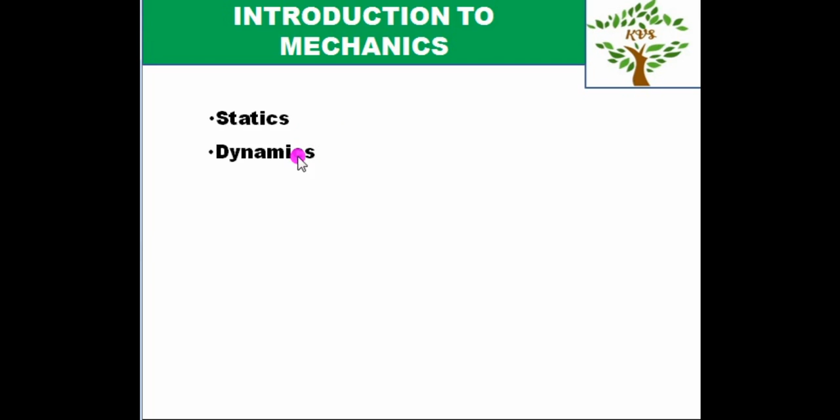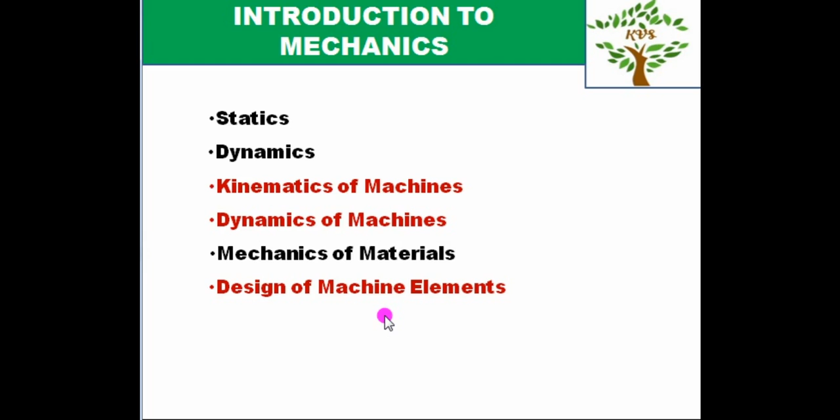Mechanics is not a single course, it is a sequence of a few courses. They are statics, dynamics, kinematics of machines, dynamics of machines, mechanics of materials, design of machine elements, design of transmission systems, and fluid mechanics.

Out of these 8 courses, except fluid mechanics, in all the courses the concepts of mechanics are applied on solids. In fluid mechanics, the concepts of mechanics are applied on liquids and gases. These liquids and gases are commonly known as fluids.

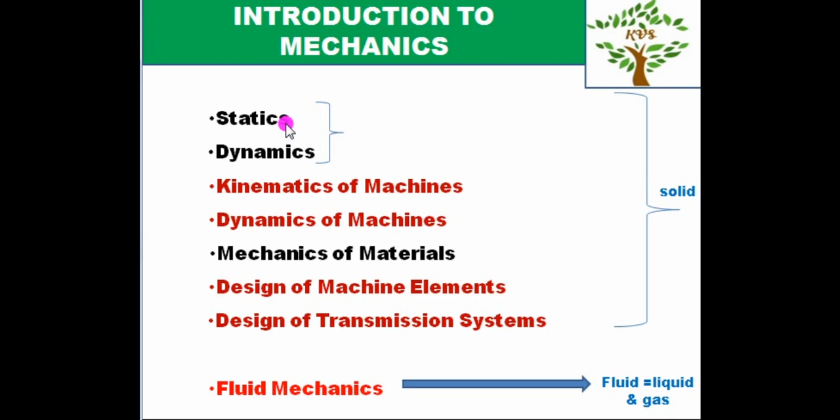When statics and dynamics are combined, they are called engineering mechanics or rigid body mechanics. Similarly, when kinematics of machines and dynamics of machines are combined, they are called theory of machines or mechanics of machines, and mechanics of materials is also known as deformable bodies mechanics.

In this semester, we will discuss statics, part of engineering mechanics. The dynamics part of engineering mechanics will be discussed in the second semester. Kinematics of machines, dynamics of machines, and mechanics of materials will be discussed during your second year. Design of machine elements and design of transmission systems will be discussed during your third year. Fluid mechanics will be discussed during your fourth and fifth semesters.

In summary, mechanics is a branch of physical sciences that is concerned with the state of rest or motion of bodies that are subjected to the action of forces. In general, mechanics can be subdivided into 3 branches: rigid body mechanics, deformable body mechanics, and fluid mechanics.

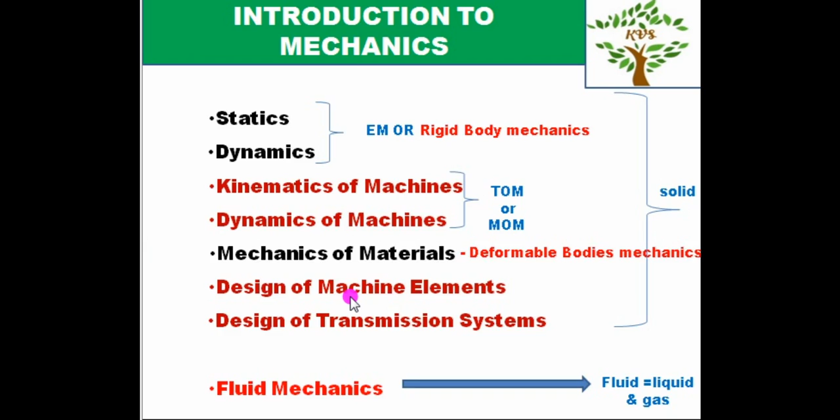Now, let's start our discussion about the course engineering mechanics. Engineering mechanics is the science which deals with the effect of forces on objects either at rest or in motion. Engineering mechanics is classified into 2 categories: statics and dynamics. Statics deals with bodies at rest and dynamics deals with bodies in motion.

Dynamics is further divided into 2 categories: kinematics and kinetics. Kinematics is the branch of dynamics in which the forces which cause the motion are not considered. Our main focus is displacement, velocity, acceleration and time. Kinetics is the branch of dynamics which considers the forces which cause the motion.

So, statics deals with the equilibrium of bodies and dynamics is concerned with the accelerated motion of bodies. We can consider statics as a special case of dynamics in which acceleration is 0. However, statics deserves a separate treatment in engineering education since many objects are designed with the intention that they remain in equilibrium.

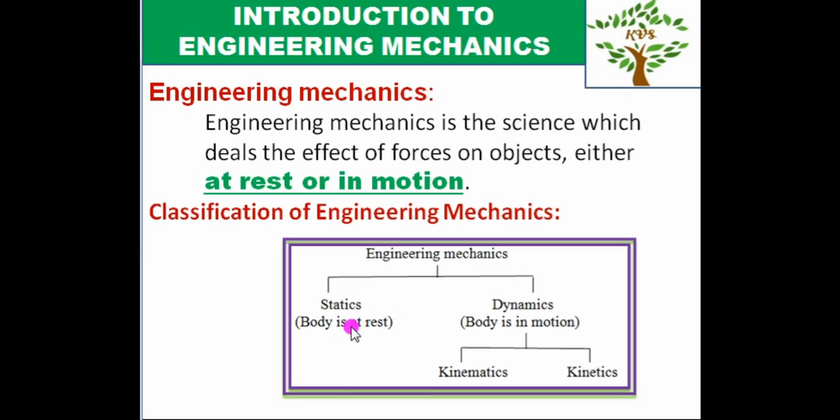Rigid body. A rigid body is a body which does not deform under the action of forces. A rigid body can be considered as a combination of a large number of particles in which all the particles remain at a fixed distance from one another both before and after applying a load. A rigid body differs from an elastic body in the sense that the latter undergoes deformation under the effect of forces acting on it and returns to its original shape and size on removal of the forces acting on the body.

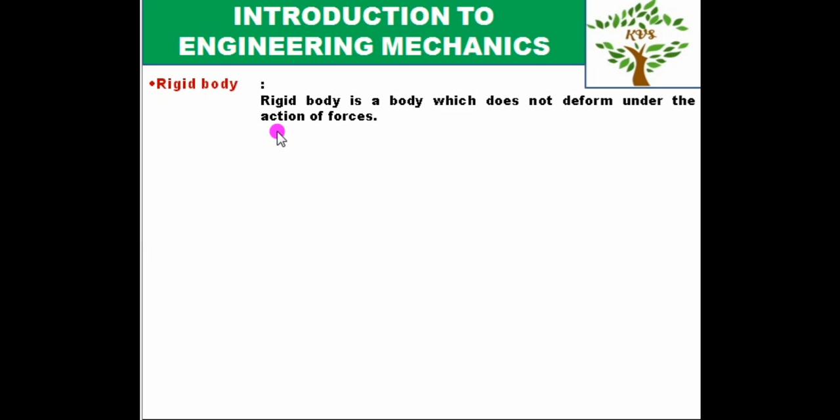In a real sense, no solid body is perfectly rigid because every body changes its size and shape under the effect of forces acting on it. In actual practice, the deformation, that is, the change in shape and size of a body, is very small and therefore it may be considered as a rigid body.

Particle. A particle may be defined as an object whose mass is concentrated at a point, which means a particle has mass but a size that can be neglected. For example, the size of the Earth is insignificant compared to the size of its orbit, and therefore the Earth can be modeled as a particle when studying its orbital motion.

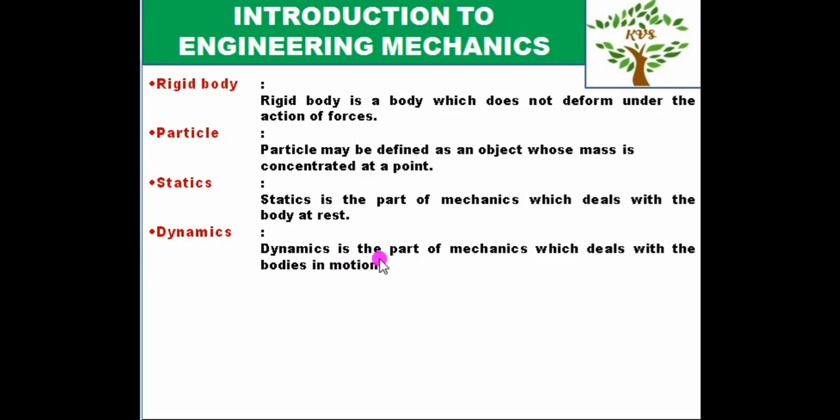When a body is idealized as a particle, the principles of mechanics reduce to a simplified form since the geometry of the body will not be involved in the analysis of the problem. Statics. Statics is the part of mechanics which deals with bodies at rest. Dynamics is the part of mechanics which deals with bodies in motion.

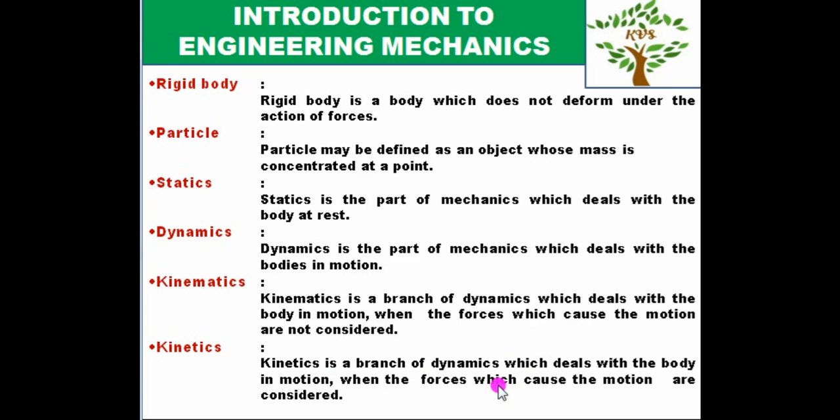Kinematics is a branch of dynamics which deals with the body in motion when the forces which cause the motion are not considered. Kinetics is a branch of dynamics which deals with the body in motion when the forces which cause the motion are considered.